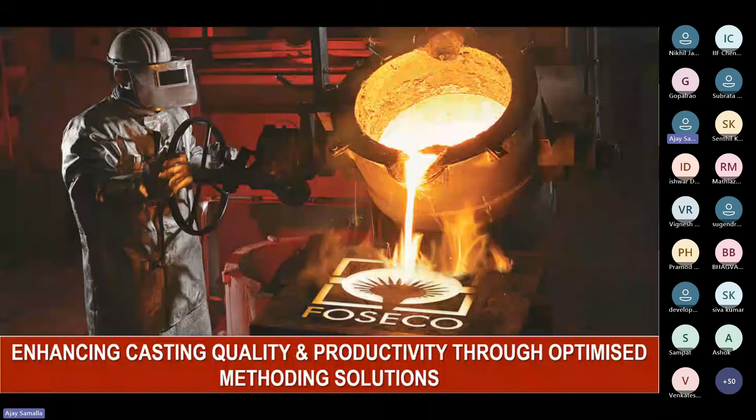Myself, Nitin Patil, and today my colleague Rohan Joshi will explain methoding solutions, majorly the topic related to improving quality and productivity through optimized methoding solutions.

As we know, Foseco is a preferred foundry supplier and a well-established brand, and we majorly supply products with respect to feeding, filtration, coating, binder, non-ferrous, and FMT. So we have the entire portfolio required for foundries.

Regarding our presence, we have a global presence, with global R&D in Enschede, corporate office in UK, and presence in more than 40 countries, with a strong technical database and technical teams across all product backgrounds.

As you know, in foundry, consistent quality is most important. So we provide products with consistent quality, and we have a strong supply chain with sales teams available at regional levels across India, and warehouses from which we supply materials to customers.

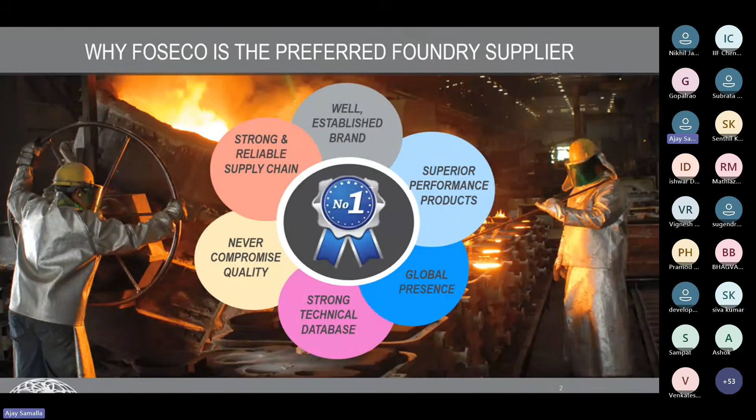So today we will discuss majorly the feeding system. The major agenda: first we will start with the market scenario, discussing the current situation and the future of the foundry market, then we will discuss the feeding system and riser thumb rules.

Then we will discuss Foseco offerings related to sleeves - Kalpur sleeves, regular sleeves, and FEEDEX HD sleeves. After that, we will discuss a comprehensive approach for methoding, and then specially Foseco methoding support with the Foseco Pro Module. So we will start with market scenario.

One second, Mr. Nitin, somebody else has started their own sharing. Mr. Dharmendra, requesting you to stop sharing please. Sir, please stop sharing. My God, a lot of people are sharing the screen. AI engineering has also started sharing. Requesting members to please stop sharing except the speaker. You can change those settings, I think. How will the settings be? Shailesh, see - yes sir, you should allow only the speaker to share. Okay, share the screen.

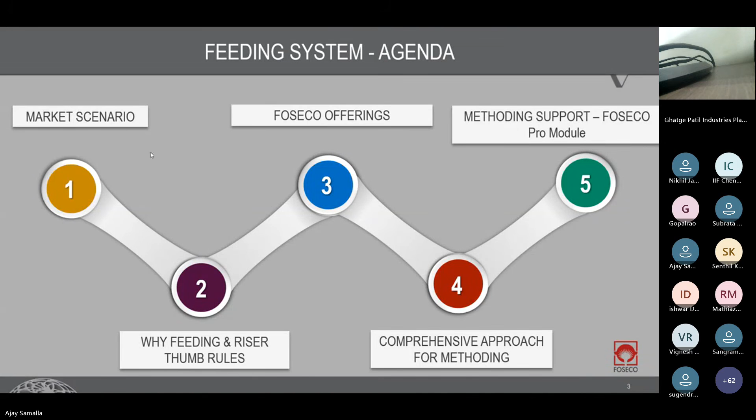I think the Foseco team can still try to share the screen actually, so it automatically pops up. No, what I'll do is make AIA an attendee so they will not be able to share. Present - is that okay? Yeah, it's fine, it's visible. Please now go ahead. Yes, yes, thank you. Please go ahead sir.

As you know, iron foundry has grown by 6 to 8% over the last decade and is expected to grow at the same pace or more. Make in India initiatives from the Government of India, various infrastructure development, and improving consumption are further expected to help growth through various government policies. In India, we have more than 4,000 foundries, and the market is very competitive, with fluctuating raw material and energy costs being the major challenges for all foundrymen. So these are the current market scenarios.

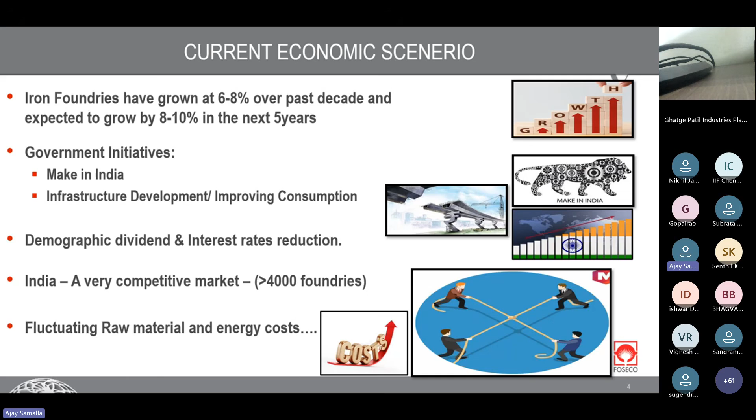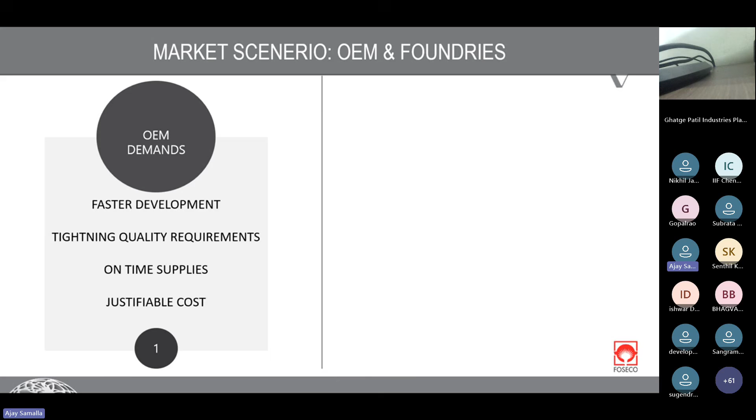Related to OEM demand, the foundry's first expectation measure is quality - good quality cost casting. Second is productivity - to improve yield, reduce rejection, optimize production cost, and simplify the process. So to match OEM demand, it's very important for foundries to improve quality, productivity, reduce cost, and maintain process control.

So all these parameters are important to satisfy now the OEM demands. So impact of quality and productivity on foundry performance.

As you know, suppose there is method A, and good melting is 100 metric ton. In that, yield is suppose 60% and rejection is 10%. So foundry output is 54 metric ton. With method B, same melting is 100 metric ton, we have improved the yield by only 5% and controlling rejection by 5%. So foundry output is increased up to 62 metric ton. That means total foundry output is improved by almost 15%.

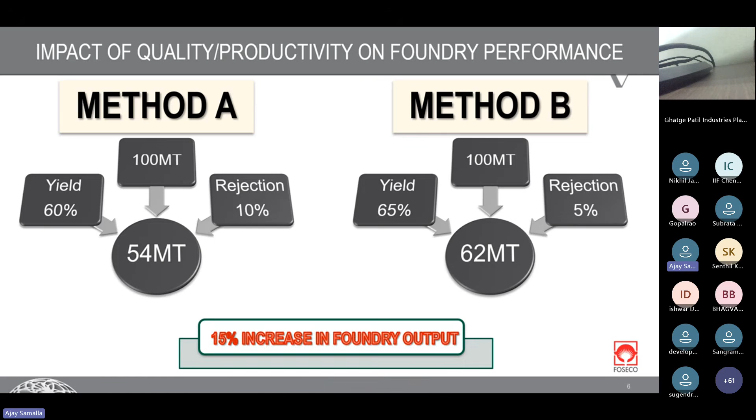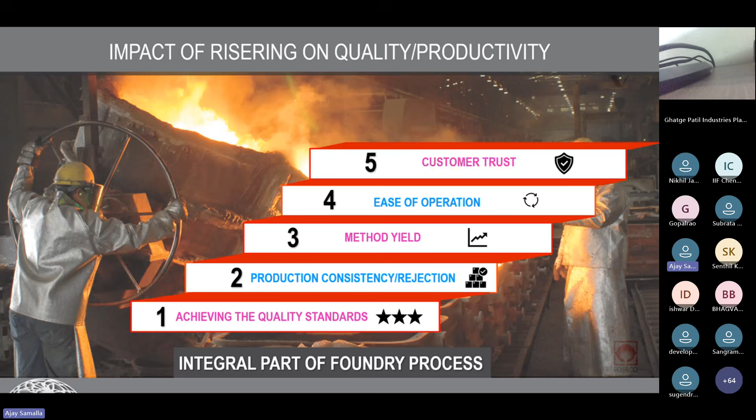Impact of risering - as you know, risering is the most important parameter. So impact of riser on quality or productivity. Risering is an integral part of the foundry process, important for achieving the quality standard expected from OEMs, for production consistency, to control rejections, and to improve the methoding yield. Ease of operation means reducing fettling cost and saving fettling time. Currently we are facing major challenges with respect to fettling. To save this time and supply casting in time, methoding is an important part. And then customer trust - these are the major impacts with respect to risering system design.

But how to implement it and how to improve the performance of the foundry? So what are the aspects? Can anyone tell us the aspects to consider while designing the risering? We will make this session slightly interactive. So, anyone?

Yes, it is modulus of the casting and volume to be fed. Correct. Anyone? Any other aspects other than volume, modulus? On a lighter note, there are no negative marks for this. Wall thickness of castings - yes, correct. Metallurgy being poured - yes, great, correct.

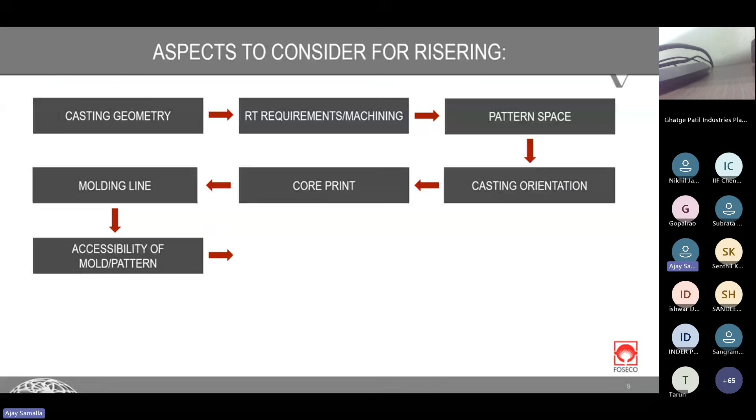So modulus, volume, metallurgy, wall thickness - these four. Now which are the aspects to consider for designing the risering system? First is casting geometry - depending on casting geometry, we select the risering system, whether top riser or side riser. Then requirement of RT, whether NSD level 1 is acceptable in some section or level 2 is acceptable, depending on that we will design. Then pattern space utilization - better utilization of pattern space also depends on that, we will select the riser. Casting orientation, core print, mold print also, some molding lines.

Some molding lines don't have access to insert the sleeve application from the parting line, because currently high productive lines like Disamatic have pouring box and molding speed of 300 numbers per hour. It is very difficult to place the sleeve, so that also affects the risering system design. Then type of riser and placement, whether side riser or top riser - these are the various aspects to be considered for risering.

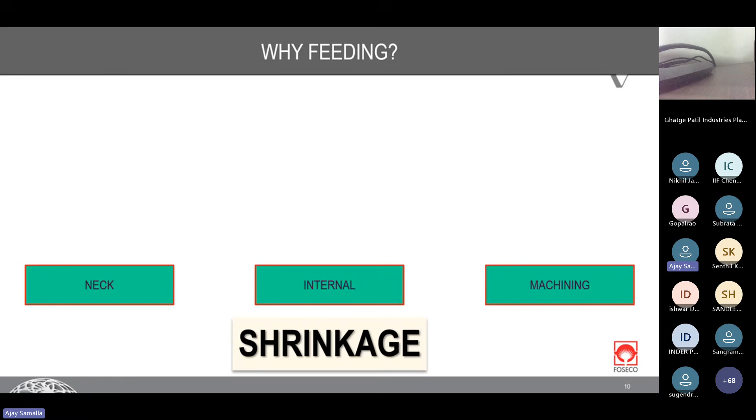So why feeding? As you know, the feeding, or the risering system design, is designed to avoid the major shrinkages. The shrinkages are neck shrinkages, internal shrinkages, and machining shrinkages. Machining shrinkages are opened after machining, so rejection after machining involves more cost - it will add machining cost also.

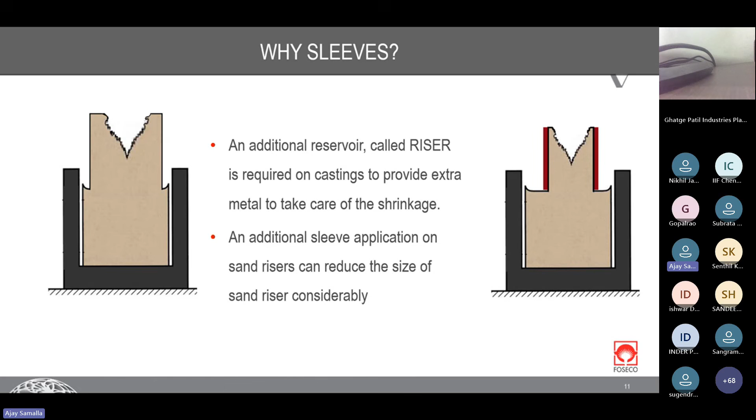Why sleeves? Generally customers earlier used sand risers, so an additional reservoir called riser is required for the casting to feed extra metal to avoid the shrinkage. But additional sleeve application on a sand riser can reduce the sand riser considerably. If you see, instead of sand riser, if you replace it with a sleeve with very good MEF, that will save 70% of metal. We will see that in the next couple of slides. That's why sleeves are very important.

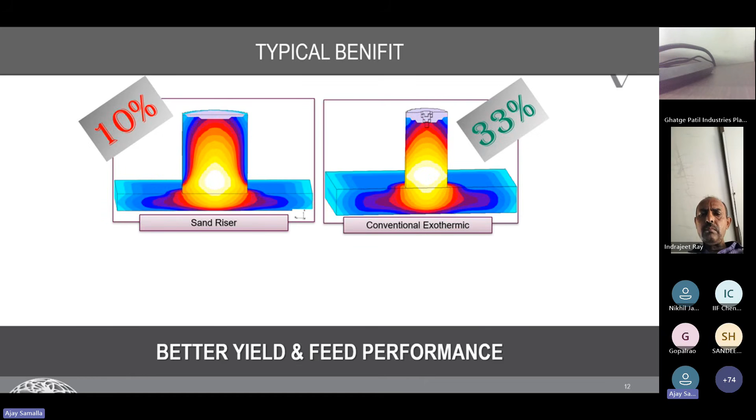Sand riser efficiency is 10%, while conventional exothermic riser efficiency is 33%. If you compare a sand riser of weight 8.4 kg and replace it with exothermic sleeves, it will give 2.1 kg of metal, saving over 75% of metal. So from 100% sand riser requirement, you can reduce to only 25% feed metal requirement with the help of a sleeve. This is because of sleeve exothermicity, but sleeve MEF is also important while selecting these sleeves.

Feeder calculations. Can anyone tell what are the major factors, important considerations to calculate the feeder? Only feeder design, not the running system.

A location of the feeder, where we have to give the feeder - there. Yes, correct. Very good.

I think last time someone mentioned modulus, which is used to ensure the feeder solidifies last. Modulus is the volume upon cooling surface area.

Screen is visible? Yeah, screen. I think somebody else has shared. I think somebody has reshared. We need to share it again. You shared again. Now visible? No, not yet. Now? Yeah, now I think it's visible. Okay, fine.

So the first one is modulus. To ensure the feeder solidifies last, modulus is volume upon cooling surface area. Modulus is the first consideration while designing a feeder. The next one is feed metal requirement, to compensate for the metal shortfall. Feed metal requirement depends on the grade of the casting, whether cast iron, HN, and so on.

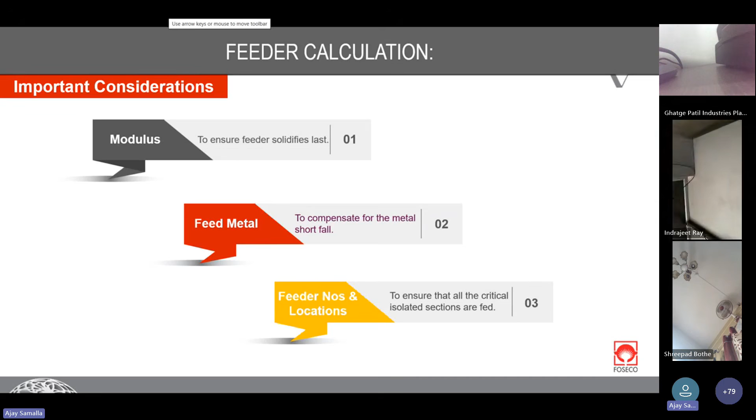Feed metal requirement is to compensate for the metal shortfall. The third one is feeder numbers and locations, to feed all the isolated areas - so feeder numbers and locations are important. We will discuss one by one.

So modulus and volume - can anyone tell what is the modulus? Volume upon surface area, okay correct. So modulus is volume upon surface area, and while selecting the feeder, the modulus of the riser is 1.2 times the modulus of the casting, to solidify the riser later than the casting and shift the hotspot from casting to riser.

For volume requirement, it depends on the percentage shrinkage factor of that alloy and the feeder efficiency. If there is a sand riser, feeder efficiency is 10%. If it is a conventional sleeve riser, feeder efficiency is 33%. And if it is a high density feeder with higher MEF, the feeder efficiency is 50%.

For example, if the casting weight is 10 kg and shrinkage is 4% in normal HN, which we have considered, and feeder efficiency is 50%, then the final feeder weight is 800 grams. So for 10 kg of casting, feed metal requirement is 800 grams in case of a high density, highly exothermic sleeve. So this covers modulus and then volume.

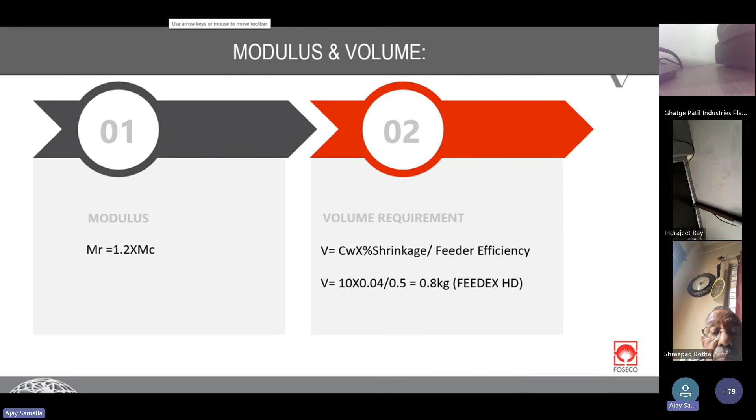Sometimes we need to calculate modulus for a particular section. For that, it is area by perimeter. Suppose A is length and B is thickness, then modulus is A into B divided by 2 into A plus B. C is the non-cooling surface, which we have considered. That's why it's A into B divided by 2 into A plus B minus C.

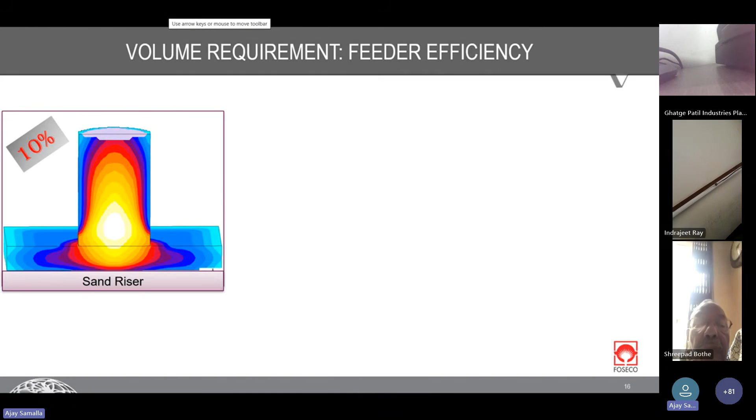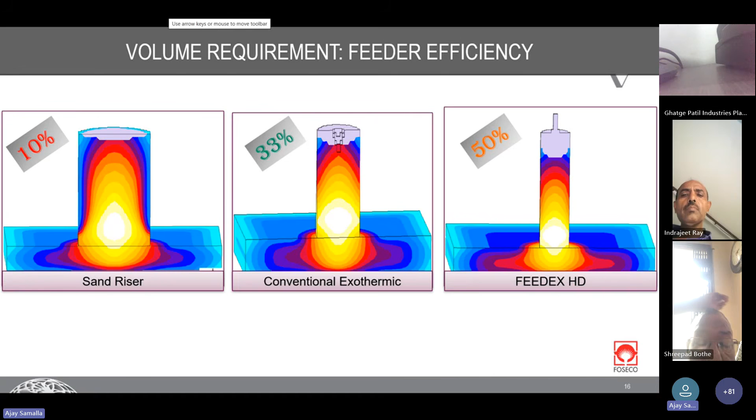Now we'll discuss volume requirement, which also depends on feeder efficiency. As we discussed, sand riser is 10%, conventional exothermic is 33%, and FEEDEX HD is 50%. So depending on the riser you select, you can improve your productivity or increase your yield percentage, depending on whether you use a conventional exothermic sleeve or FEEDEX HD.

Riser location, hotspot connection, and neck size. You know the riser location, hotspot, and neck size are important factors while designing the running system or feeding system.

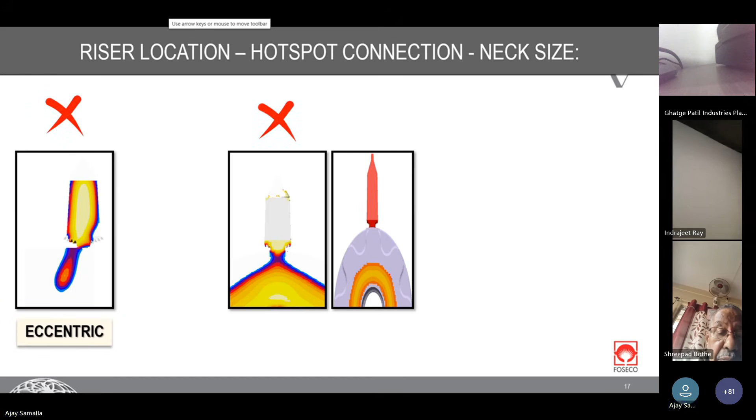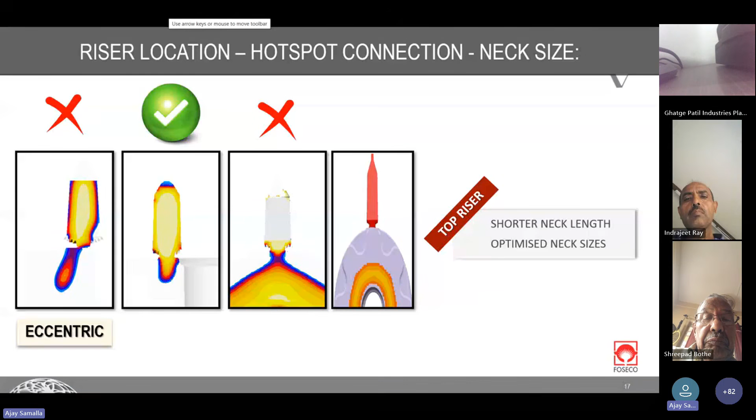These are the two cases where first case is riser offset and second case is neck, hotspot is cut off in neck. This is the correct case where hotspot is going inside the riser. So while designing the feeding system, shorter neck length and optimized neck size and neck location is also important, to avoid the shrinkage.

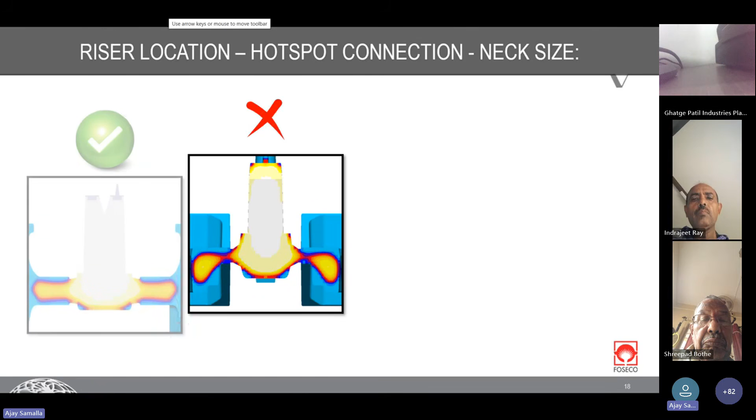In side riser also, here we can see the neck modulus is lower. That's why neck cutoff is observed and shrinkage remains inside the casting. That's why proper neck design is also important, and neck length. In side risers, neck length plays an important role.

Sometimes during designing some development, some methoding engineer increases the neck length, up to 50 mm, but in that case neck cutoff is observed and that will cause shrinkage inside the casting.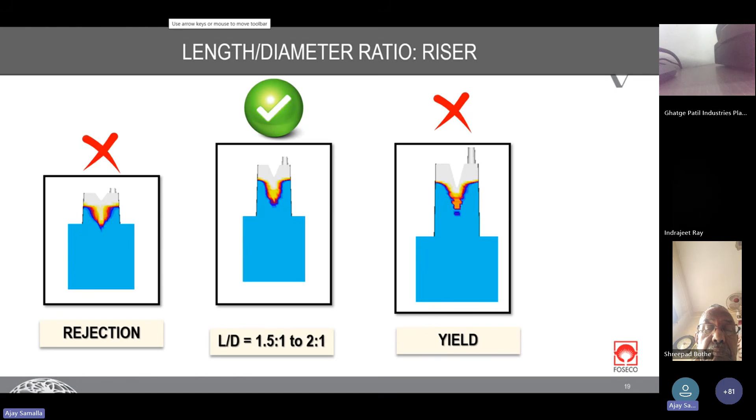So foundry process also impacts the shrinkage. Can anyone tell what are the various process parameters which will affect the methoding, or which can impact the shrinkage inside the casting?

It's the pouring temperature. Yes, correct. Temperature. Carbon equivalent value - correct. Mold hardness. Yes, correct.

Okay, thank you. So, high magnesium value - yes, correct. Exactly correct.

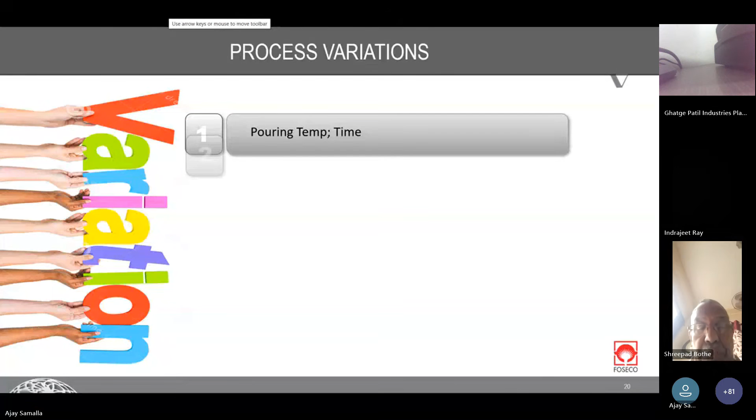So we will discuss one by one various process variations. First one is correct pouring time, pouring temperature and time, which will impact. High pouring temperature will increase the shrinkage. Pattern allowance, not as per drawing, more pattern allowance causes swelling, which requires high feed metal requirement and causing shrinkage. Poor quality of sleeves and using after expiry, that will also impact.

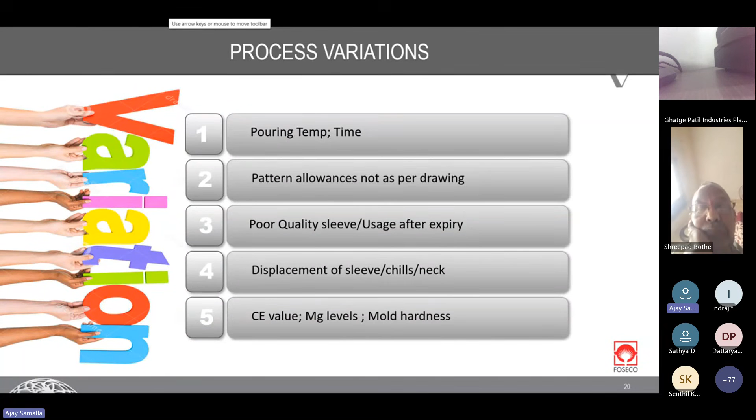And location means displacement of sleeve, chills, and neck size. And the last one is carbon equivalent value, magnesium level, and mold hardness. So these are the various process parameters which will affect the risering systems.

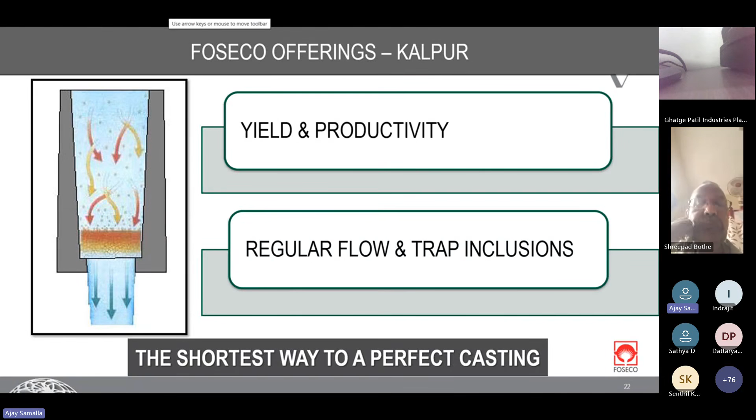Now we will discuss various types of sleeves. First, we will discuss Kalpur sleeves. Kalpur is a sleeve where filter is placed inside the sleeve and we can pour the casting. This is used to improve the yield and improve the productivity. Because of the filter, it will improve the flow, laminar, and it will trap the slag inclusions. So it is the shortest way to perfect casting, and it will improve yield and productivity.

So these are the major benefits of Kalpur. It will improve the yield. It will eliminate the traditional running system and riser. No need for ingates, running system, sprue. It will reduce the fettling because of no ingates, and reduce the fettling time.

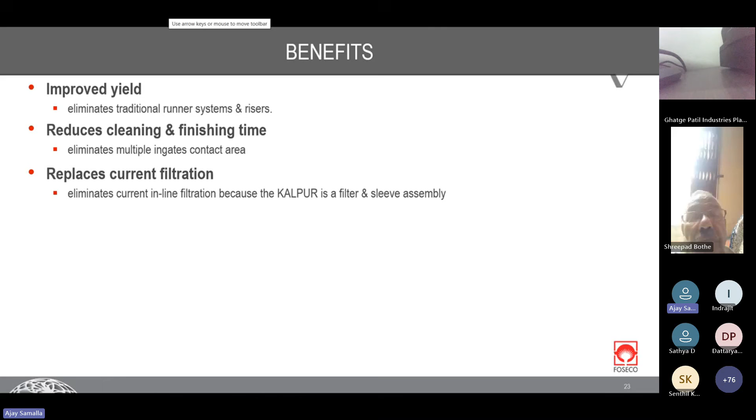Replace current filtration system - inline filtration system will be eliminated with the help of Kalpur. It will improve productivity, reduce pour weight, and eliminate running system. It will help remove the shrinkage, transferring the hotspot from casting to the sleeves.

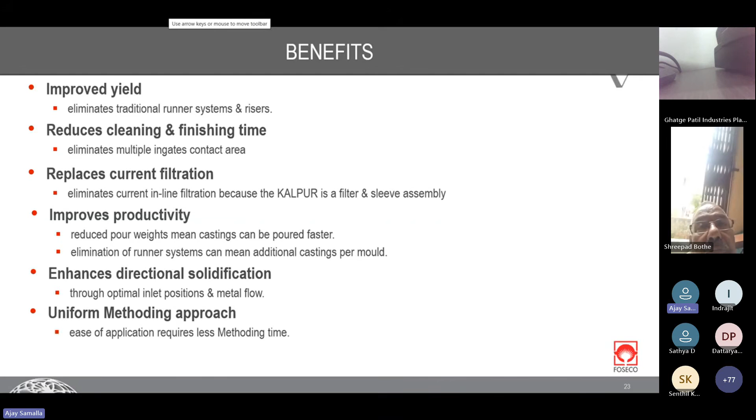So it will be important, and uniform method, its ease of application - because of Kalpur, no need to calculate choke area, running area, inlet area, whether pressurized gating system or non-pressurized gating system. So with Kalpur methoding we can save our methoding time, and ultimately, with all these points, we will maximize the profit.

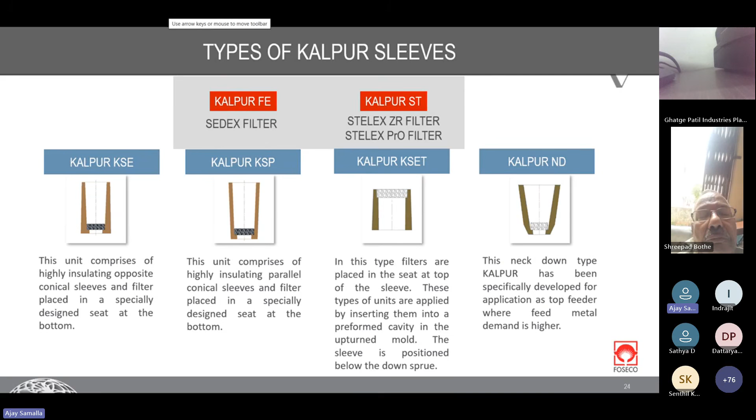So these are the various types of Kalpur sleeves. And now we can see various case studies with respect to these Kalpur sleeves.

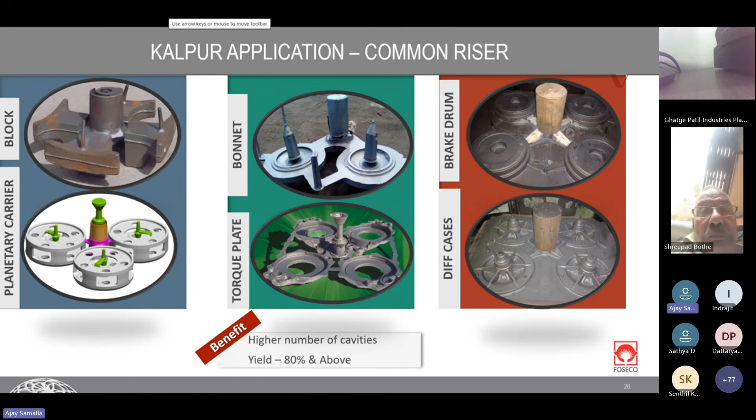So now my colleague Rohan will continue with the regular sleeve and Feedex HD.

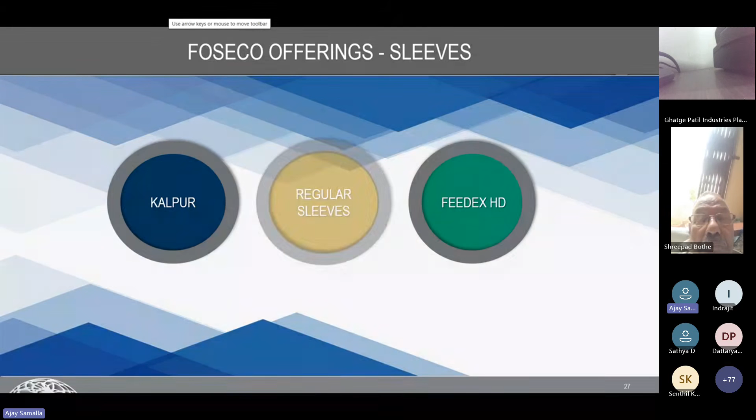So we looked at a very interesting product, that is the direct pour unit. And now moving on to the regular slurry sleeves. And here is the product range available as of now. Over the last 20 to 25 years, we have developed a lot of sizes for this. And these are available in both open cylindrical, open blind, and neck down type as well.

And in case of cylindrical sleeves, these are also available with the breaker core type. We have both recipes for this, that is insulating and exothermic. And the dias are ranging from 30 dia to almost more than 300 dia. So what this means is that we are covering the overall modulus and volume requirement range for both iron castings and steel castings.

So now let's look at the different types of applications that are possible for these kind of sleeves. Firstly is the insert application, and this is specifically used for riser sleeves which are with the breaker core and as a top riser. So here you can see clearly that once the mold is prepared, there is a cavity into which the sleeves are fitted in and the box is then closed. So this is called insert application.

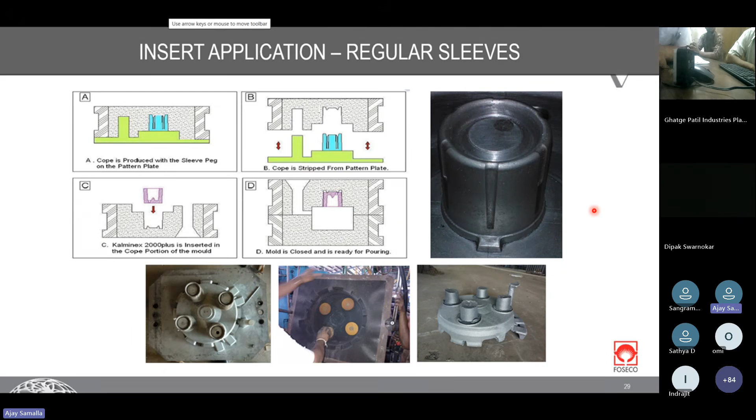Draft of the sleeve is same, correct? The main aspect with respect to pattern is that these sleeves are placed on a flat face for insert application. If the casting face or wherever they are placed is not flat, this kind of application is difficult. That is the main point here for such kind of sleeve application.

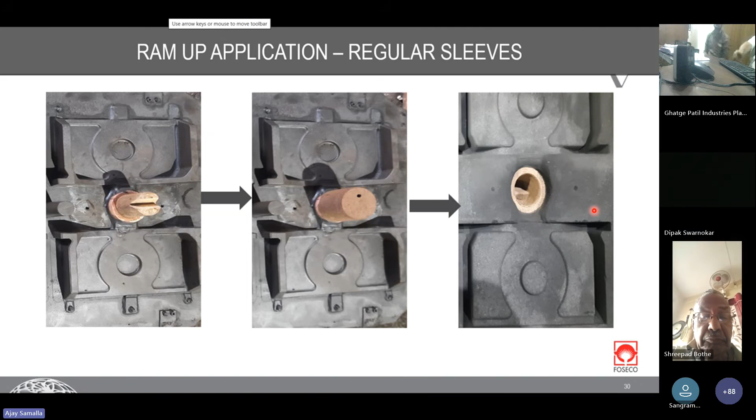So this is one part. Then moving ahead, as we have seen for Kalpur, even these regular sleeves can be placed through core or placed on top of the core and feeding can be done through it. This is the third type of application.

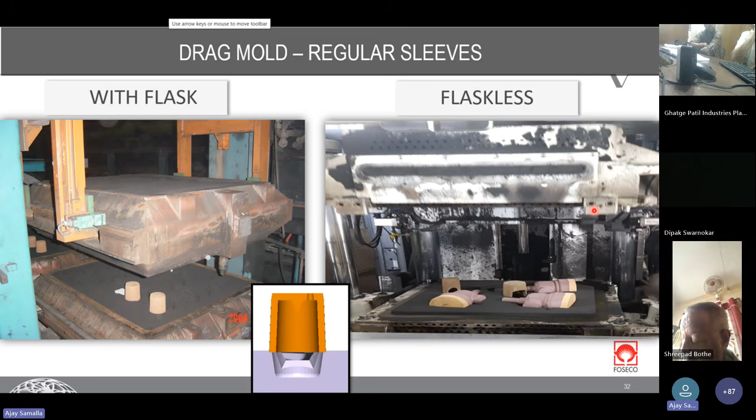Then one more application which is getting more useful in flaskless lines where the cope mold is not accessible is placing of sleeves in the drag mold. What we call this as a closeover application, wherein the sleeve is placed in drag and then the cope mold gets closed over it. A small groove of around 3 to 5 mm is created in the drag mold so as to lock the sleeves in that place. So many customers using DISA match or Sinto lines, flaskless lines, are using this kind of methodology.

Similar application we can find in vertical line as well, wherein the sleeves tapered downwards can be placed from the mold top. And the other application for vertical line is placement of sleeve through the core setter. Now, especially for cored items, core setting is required, and based on that, even sleeves can be fitted into the mold at the same time.

And in case of mold top application, we need to consider that the draft of the sleeve should be downwards. That means the OD at the top should be higher, and that way only we would be able to place the sleeve from the mold top.

So considering all these applications, you can clearly see that there are three locations wherein we place risers: at the parting line, as a top riser, or at the cake area, in between, or through the core. These are the three areas wherein we place the riser.

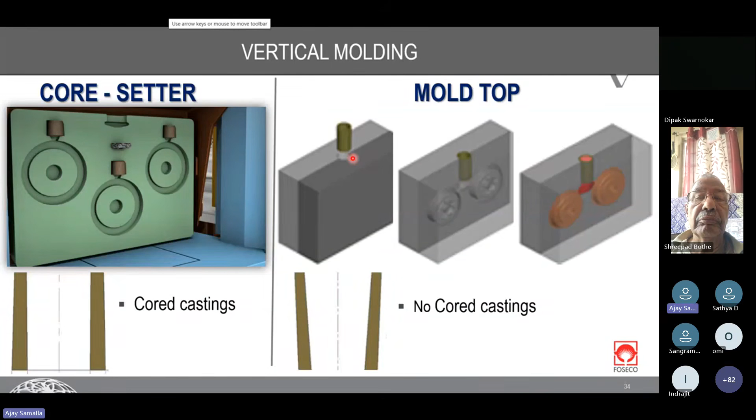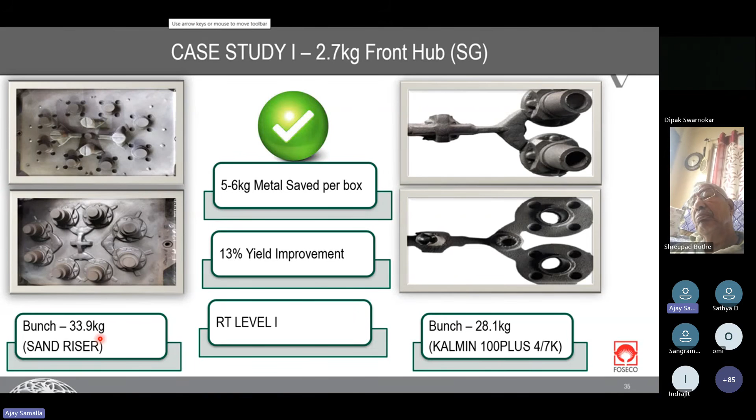Now imagine if I went for optimization but also tried improving the soundness as well. In that case, I would have required a higher size of riser, which would not have resulted in any fruitful point in terms of yield. Yes, we improved the soundness which was not required, but we also did not improve the yield or optimize the overall method. We need to combine both the casting quality and productivity.

So any doubts up till now, or can we move ahead? Rohan?

Is there any specific reason to use the Kalmin sleeve here? Because we can also use Kalminex for this type of casting. Yes, for sure, but that depends on the cost as well. Based on the combination of cost and customer preferability, we went for Kalmin 100 plus. But yes, we can also think of riser reduction with an exothermic sleeve.

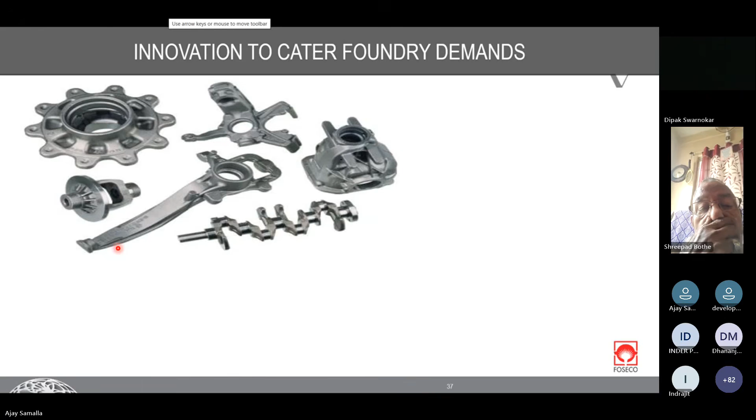Mostly you will agree that all these castings will be produced on green sand high pressure molding lines. As we had earlier discussed, OEMs are reducing casting weights, which generates more isolated hotspots, and there is less space on castings to place the risers. On top of that, we have our constraint of high pressure molding lines, and thus the riser has to bear the squeezing pressure as well.

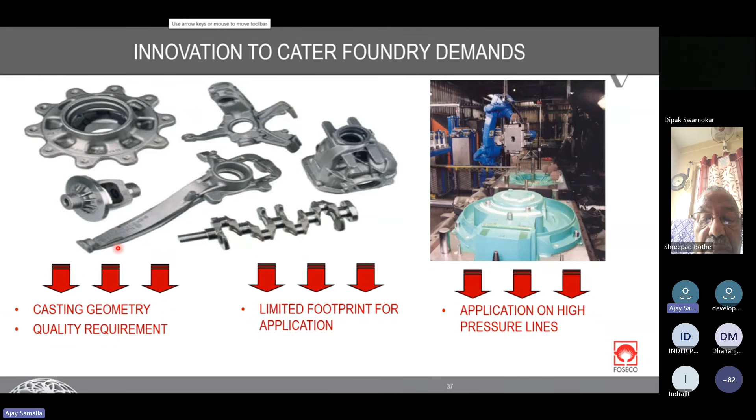Considering all these aspects, spot risers were designed, firstly, to withstand the squeezing pressures. Secondly, to be able to place on the smallest footprint area on the casting. And most importantly, to provide soundness in the most complex part of the casting. As the saying goes, feed where you need, and that too with ease of application.

Feedex HD application is quite common these days, and most of you might know it is a simple locating pin application over which the sleeve is placed while molding. This is how the feeder looks like, and the knockoff of the feeder would be very minimal.

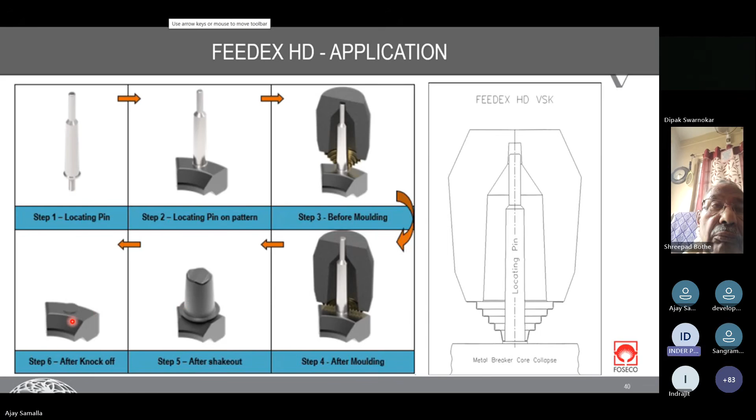Typically we have discussed the yield part, but I'll reiterate it. In terms of sand riser to Feedex HD, if we see the conversion or yield improvement we can achieve from an 8.4 kg sand riser, we can go down to 800 grams. That is just 10% of the conventional sand riser weight. Not only that, we are also improving the riser efficiency from 10-15% to almost 50%.

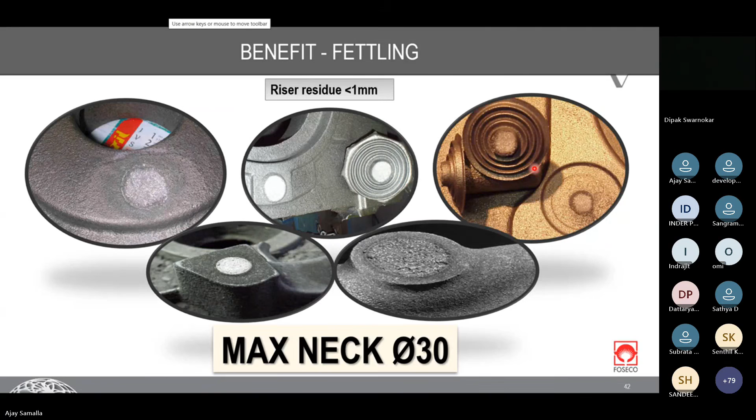The second aspect is of fettling and cleaning work. The maximum riser neck size for Feedex HD is around 30 mm, and most of the risers are hammered out easily without any requirement of cutting or fettling work. The most important aspect is feeding the isolated areas which cannot be fed by any other options.

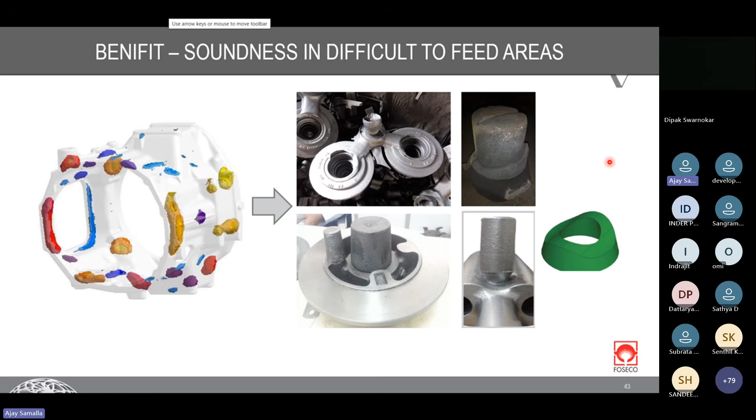Typically in foundries, we find heavy padding at neck areas, heavy sand risers or sleeve risers as side risers, chills being used, or sometimes profile breaker cores. Not only are these operations very tedious, but they also result in inconsistency in the methoding, and rejection levels are quite high in such cases. If we are able to replace such tedious activities with simple pin application, we are definitely improving the foundry process and its productivity.

So overall, if you see, it is a product which provides multiple benefits. It will provide you with the highest possible yield, and you can provide the riser at the smallest footprint area, and thus provide soundness to the casting. Typically, if we consider the current scenario of high casting quality demand, the molding line constraints, and the benefits that this product provides, it has definitely gained a lot of pace, and most of the foundries are now using it.

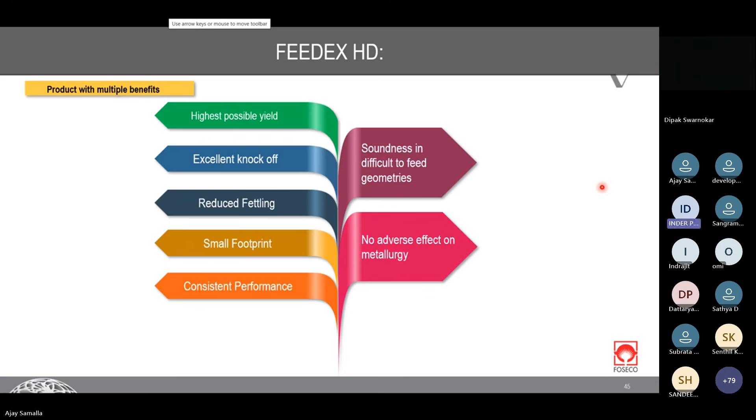Now moving on to some case study related to it, we saw some drastic changes in the yield with Feedex HD application. But how does it translate in actual casting? This is an actual case study which will showcase that effect for you.

So not only did we maintain the soundness of the castings, but we were also able to improve the productivity as well.

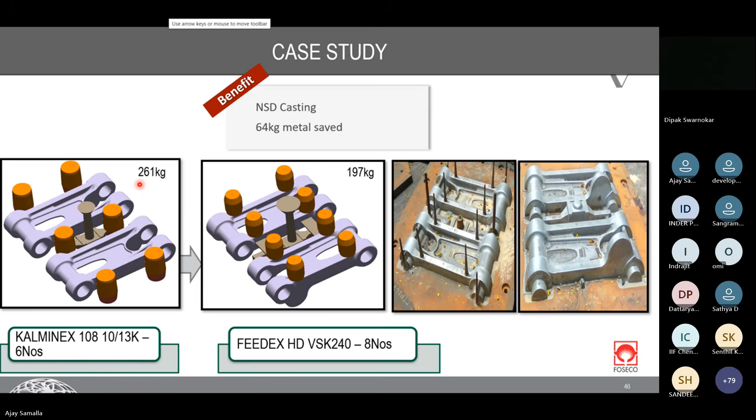So that is it about the products. We covered Kalpur, the regular slurry sleeves, and spot risers as well. But now the $1 million question is, you have told us all the types of sleeves, and shown us that all give us 80% yield. But when we are methoding the castings, which sleeves should we select? Or how do we go about creating a method?

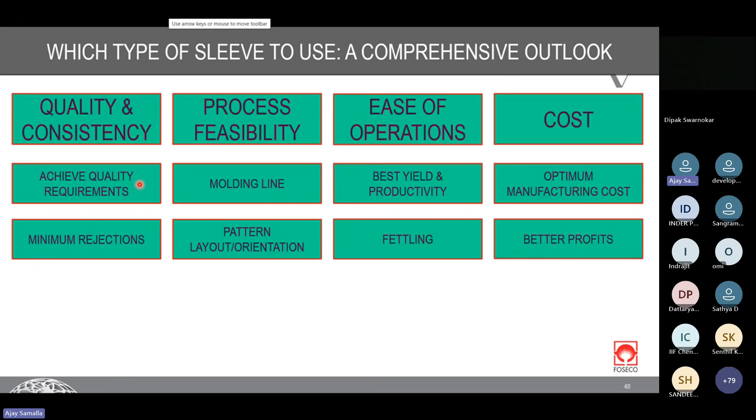So there are 4 aspects we need to consider for optimizing our methods. Firstly, we need to understand what is the quality requirement of the casting and what kind of consistency we are considering. Secondly is the process feasibility - that is the molding line, the pattern layout and orientation we are trying to keep. The third part is how we are going to introduce ease of operations in the methoding - what kind of yield, what kind of productivity we are targeting, and how we can reduce the fettling time as well by optimizing our neck sizes. And all together, at what cost, or what total methoding cost we need to consider.

So always we need to find the right balance between all these parameters: quality, feasibility, ease of operations or productivity, and ultimately justifiable cost.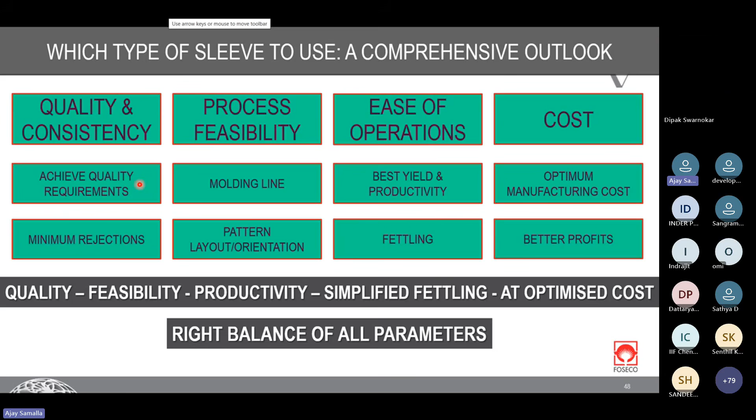So let's take an example to try and understand how a method person should go about methoding a casting or optimizing the method for it. So here is an example of an axle housing case study.

These are the three methods which we can consider. One is sand riser, having a bunch weight of 54 kg, and we are getting RT level 3, which is quite acceptable. Then here is a second method wherein we are using 2 spot risers and 1 5x11 riser - there is a yield improvement of 6 kg, and in fact we are achieving RT level 1. However, the OEM is considering only RT level 3; they are not requesting for RT level 1. In the third method, we are adding one more 5x11 riser and achieving NSD level casting.

So considering these points only, can anyone share your experience? Which method will you prefer for your foundry? Which will be the method that will give you quality and cost effectiveness?

Second method. Second method - and you need to explain why as well. Why do you think that second method will be giving you cost-wise and quality-wise better result? The yield is almost 80%, and we are at par with respect to the customer requirement for RT level, and definitely it's suitable for our molding line. So that will be the consideration for the second method.

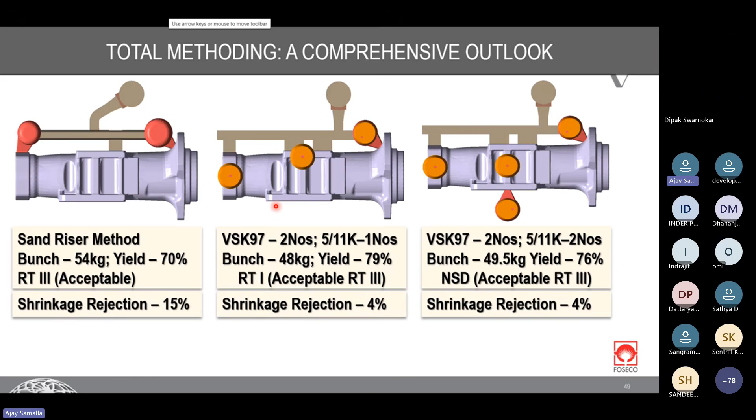Now let's check some other changes happening in the foundry. For the first method, the shrinkage percent is 15%. And for the other two methods, the shrinkage tendency is below 4%. Now, which method will you go for, and why?

So again, we'll have to go for some calculation only. But maybe with this additional input, I think the second method is preferable. So now you are in a dilemma: will the extra cost of 15% plus the 6 kg metal saving be compensated by the cost of sleeves? That is how we have to look at it.

But now I introduce a third parameter: initially you are producing just 500 numbers, that is around 20 tons of good castings. But now the requirement is 15,000 numbers, that is almost 600 metric tons. Imagine the foundry capacity is just around 1,000 to 1,500, that is almost 40 to 50% of your casting production capacity.

Now you are required to produce this casting, then definitely it will be either option 2 or option 3, because you have to manage the productivity as well. It is not just about managing the quality, but also the productivity, since you are reaching near the foundry capacity.

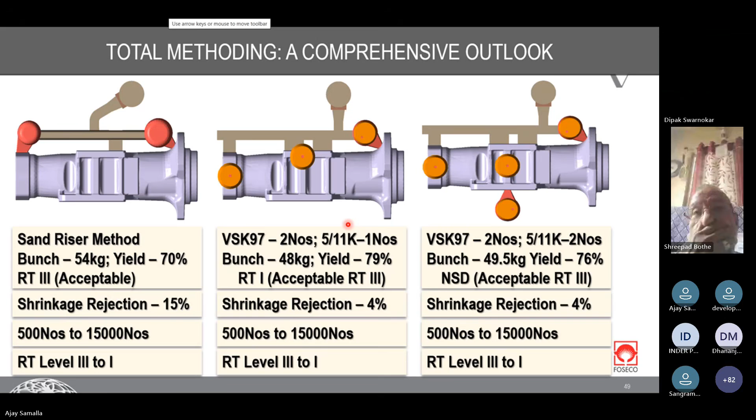You have left us with no option, sir. Now we'll have to go with the second option. Which one? We have to consider the fettling cost also, no? Yes, yes, so the second one is the best.

Yeah, but in case of the second one, yes, we are achieving RT level 1, but for consistency in production, NSD is better. The second aspect is that we are just introducing one more side riser, which is of very limited cost. So even with that, if you are achieving NSD level and giving good consistency to our method, definitely in higher production, higher volume castings, method 3 is actually preferable.

And this actually happened in one of our projects with a foundry, wherein firstly they were producing with sand risers. Their initial production was just around 500 numbers. Hence, they kept on with their conventional sand riser method. But when the OEM demanded a higher number of castings, they requested methoding support from us, and this is the method they went for.

Again, further, when the OEM shifted their demand from RT level 3 to RT level 1, we had to introduce one more riser of 5/11 in order to address all the hotspots. So that is how optimization of methoding occurs in a practical way. It is a combination of quality, productivity, how many castings you are going to produce, the molding line, and in turn, at what cost.

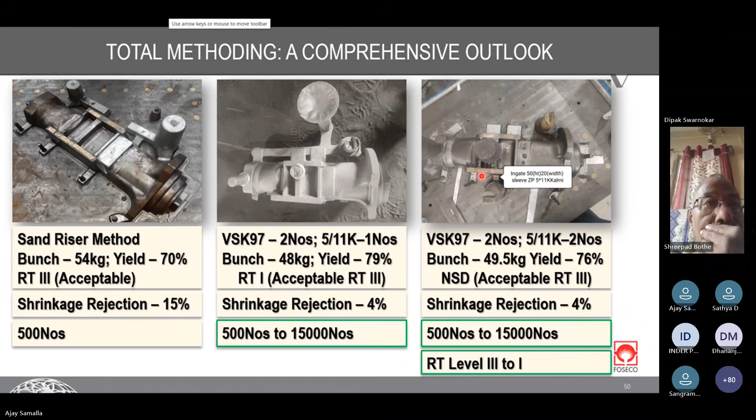So if you see this overall example, it is not always the price of the sleeve that plays a role. It is the cost of methoding that decides the cost effectiveness of your method.

And that is how Foseco also supports its foundry customers with methoding solutions. We also have Magmasoft for this. We have 3 licenses in total, and we cater to more than 200 foundries in a year together.

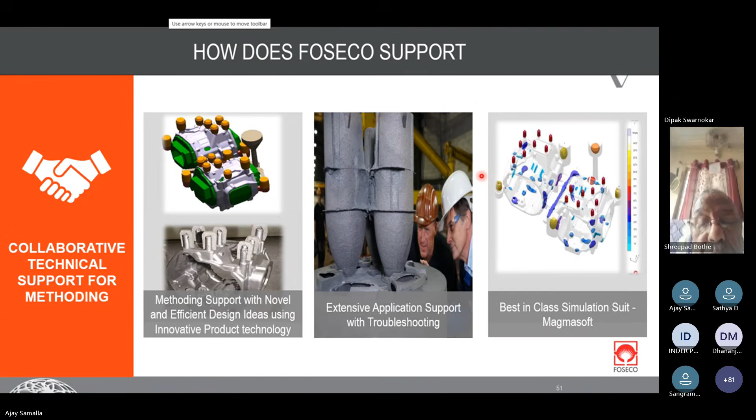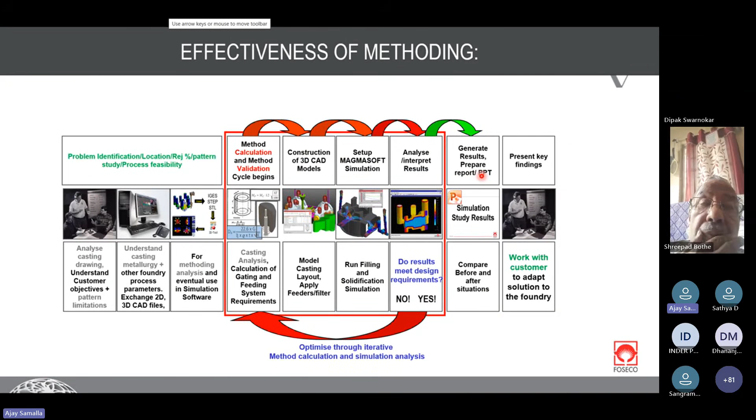So now coming to the last part, and that is how effectively you can use simulation in methoding. I'll divide this into 3 parts. First is the data or the problem statement, then the method and simulation part. We need to go for a number of iterations, and finally compare the existing results with the tried out or best possible iteration, and then go for final trials in actual production. So the first point is very critical, that is data.

We need to identify the correct problem and correct statement of improvement, and based on that we decide the number of iterations. We need to consider all feasibility aspects, try out different methods, and thus come to a conclusive optimization which will yield better results than the existing one. Or if you're going for new product development, you need to optimize the method that way.

The first and foremost is the correct identification of objective or problem, and the second aspect is simulation. In simulation, there are two aspects: the calibration we talked about previously, calibration of actual results with the simulation, and secondly, we need the correct riser performance in what actually happens, which should be replicated in the simulation.

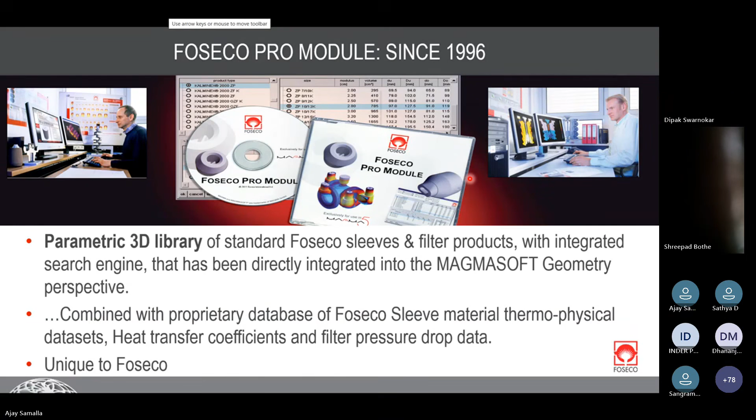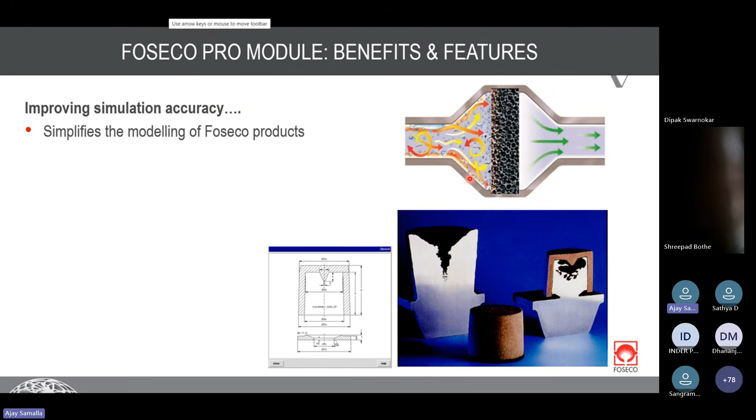The main benefit we derive from this is improving simulation accuracy. Secondly, it simplifies the method person's job, helping with ease of modeling. Third, all the data sets assigned to the sleeves are automatically assigned once we select the correct size, so we need not worry about manual error while setting up the simulations.

Overall, simulation is a key leverage for methoding. It not only helps in optimizing our methods, but also improves our decision making, finding out the root cause and thus taking the correct decisions.

With respect to Pro modules for India, all India products are available in the Pro module database, right from spot risers to regular sleeves and even filters as well.

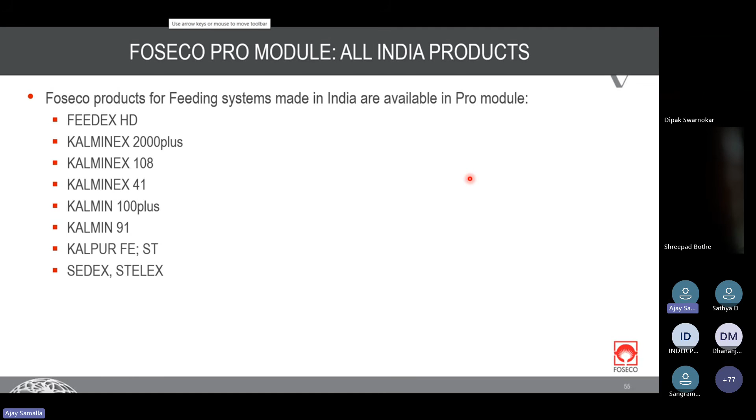That is it from our side. We covered why and how productivity and quality are important, and the current market scenario which makes these aspects critical for foundries. Then we looked at the theory behind riser calculation, different types of sleeves, their application, case studies, and what improvement they can bring for foundries. We looked at a case study of methoding as a comprehensive outlook, and finally the methoding support and Foseco Pro module that we as a team can provide for our foundry customers.

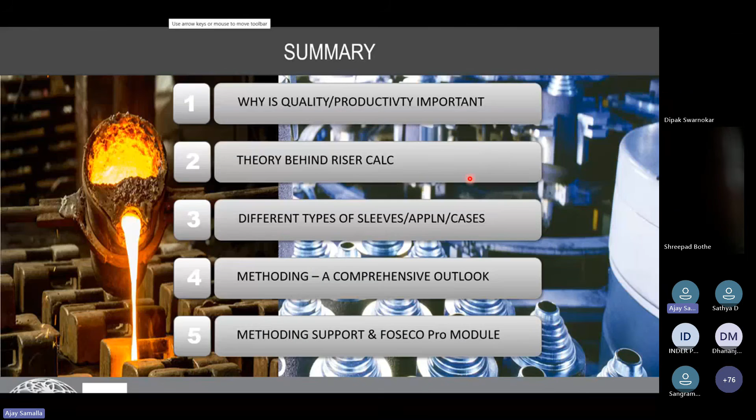Hello, thank you. I'm calling from Sangli, Maharashtra. Can you hear me? Yes, audible. We are handling nickel-based alloys like Hastelloys, Inconel, and Monels, so for that what methoding or what type of gating system would you suggest?

Whatever I heard is meant for cast iron, SG iron, and plain carbon steels, but I feel you have never dealt with duplex stainless steels, super alloys, and super nickel based alloys. Can you highlight those areas?

In a broader view, for gating system, we always suggest going for non-pressurized gating. For these high alloy castings, we have a separate team for steel. Just to give a basic understanding, the shrinkage tendency is upwards of 6 to 10%, so based on that we need to go for risering. But the thumb rule remains the same - modulus calculation, volume requirement, and feeding distances. Methoding remains the same. What we have felt is the height to diameter ratio, instead of 1 to 1.5, we go almost to double.

Thank you, sir. Thank you. Thank you, everyone. Thank you.